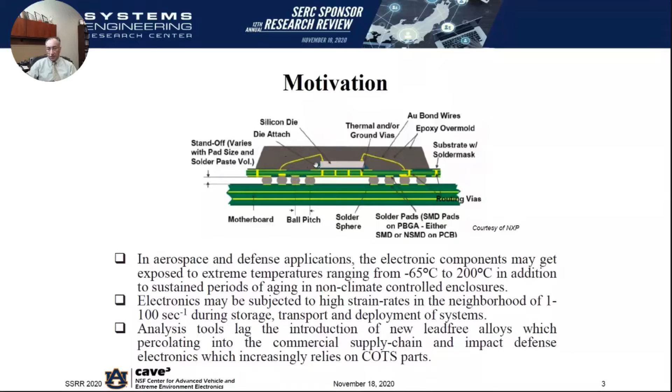So in order to develop tools for mitigation of risk, the first subtask deals with measurement and characterization of the material data and creation of some foundational data sets that would be used to develop reliability prediction models under overlapping stresses of temperature and vibration. So it's a combination of high strain rate and

temperature, and the temperature occurs a couple of different times in this presentation. Firstly, it occurs as a preconditioning method where parts may be stored for a prolonged period of time. A second way that temperature occurs is during operation, which means that the temperature of operation of the part may itself be vastly different. So the way the samples are created, we are creating uniaxial tensile samples.

One is shown right here at the bottom left. And the way we do that is by using glass tubes. So we melt the solder alloy that we are trying to study. Most of these are advanced doped solder alloys. That's what the industry is migrating to for a number of reasons. And these are starting to appear in many of the commercial parts as well. So we have worked with a number of companies to procure these alloys. We melt them in this crucible that has a heating coil around it.

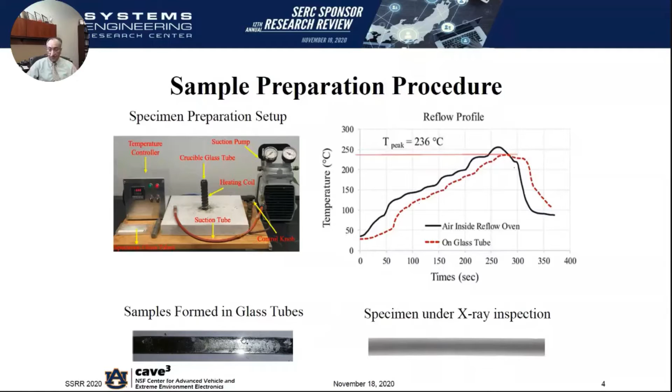And the idea is to create a thickness of the specimen that's about the same order of magnitude or similar in dimension to that of a solder joint, a package level solder joint. Although the width and length are larger, the thickness is very similar to that of an actual joint.

These are some of the test conditions that we are studying. As I mentioned, there are a couple of different temperatures that occur in this test. So the first set of temperatures are operating temperatures. They range from -65 to +200. We are also looking at a second temperature, which is the storage temperature for sustained thermal storage, and that is 100 degrees centigrade. For the most part, we also are taking data on 50 degrees centigrade.

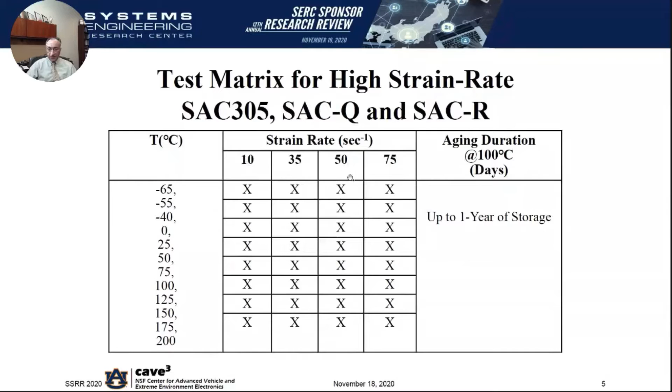A number of different alloys are being studied in this program. So SAC305, SAC-Q, SAC-R, and there are a few others that we won't talk about today. These are further along, and that's what we have more data on. That's what we'll focus our presentation today on as well. Four different discrete strain rates: 10, 35, 50, and 75.

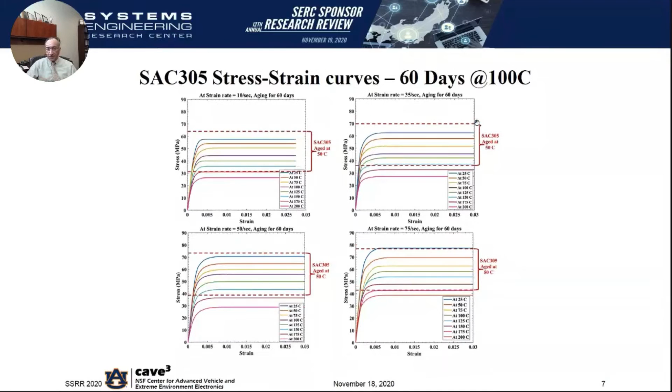And so if I was to go through and flip again, you can see as I go from 30 to 60 to 120, the curves successively migrate downwards, which indicates that the ultimate tensile strength is evolving, the effective modulus is evolving, and the material behavior is continuously changing as well. And the brackets here indicate the effect of the sustained storage temperature. These curves are at 100 degrees centigrade, but if they were at 50, that's where the curves are. And that's data that's been taken earlier on in the study.

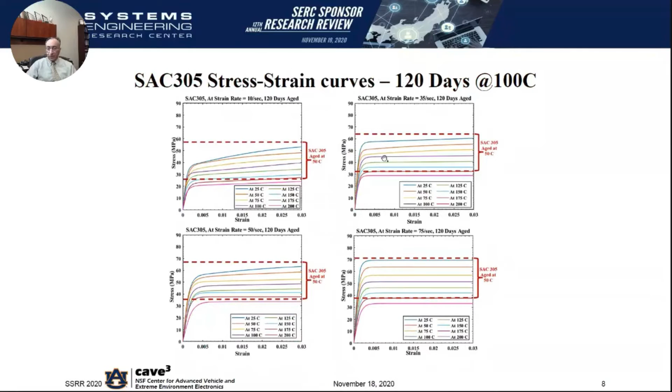So now I'm going to change gears. I'm going to talk about SAC-Q. So these are color-coded. The prior graphs were black in color in the title, and these are red. So that tells you we have shifted alloys.

And here, the data has been taken over the entire temperature range that I talked about at the beginning of the presentation, which is from -65 to +200 degrees centigrade. And so you can actually see a similar effect exists for SAC-Q as well, where as I increase the operating temperature, my ultimate tensile strength is dropping. And as I increase the strain rate, my UTS is increasing, and so is my effective stiffness.

And again, if I go from 60 days to 90 days, I can actually see the curves migrate downwards. And so the similar effect that I pointed out to you in the case of SAC305 also exists in the case of SAC-Q. So one thing that we would recognize is that the material behavior is continuously evolving.

And how does one then capture the entire material behavior in a computational framework that would allow us to simulate the reliability of these packaging architectures under overlapping stresses and be able to predict life and be able to assess risk with the usage of these newer doped alloys in these harsh environments?

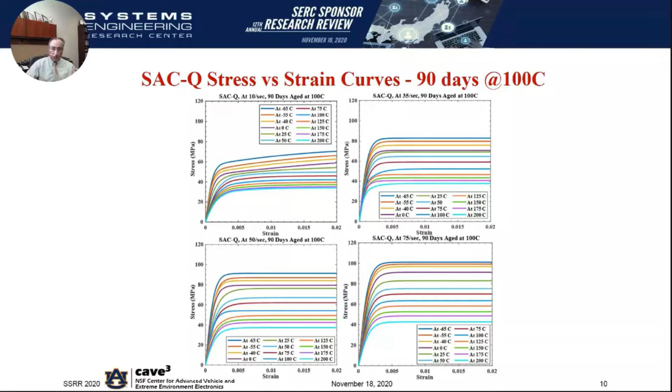So the way we have approached the problem is to use a model called the Anand viscoplasticity model. This is a model that models both the plasticity and the viscous behavior of the material. And the advantage of using the Anand viscoplasticity model is that it's available as a standard offering in a number of commercial codes such as ANSYS.

So if one was able to scale the model to represent the material behavior over the entire range of strain rates tested, over the entire range of operating temperatures, over the entire range of sustained storage temperatures, then perhaps one can actually model these assemblies as well.

So most of us are familiar with Hooke's law. Stress is directly proportional to strain in Hooke's law, and we generally use something called the elastic modulus. But because this is a nonlinear material, we are going to start off with a stress equation that looks like a pseudo Hooke's law, sigma is equal to Cs, where C here, instead of being the elastic modulus, is a parameter that depends on strain rate and temperature. So you can see the form of C here. S, instead of being strain, is an internal variable that represents deformation resistance of the material.

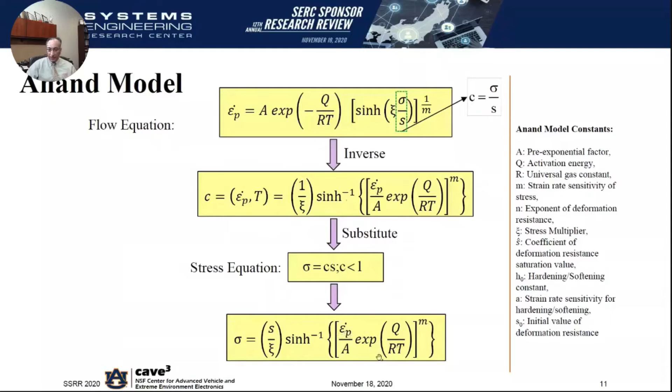And so if one takes the form for C and plugs this into this equation, one can formulate the equation for stress as a function of strain rate, temperature, and the internal deformation resistance. One can then mesh that with the evolution equation. And if one integrates the evolution equation, substitutes the saturation value of the evolution equation, and substitutes the stress equation that one computed earlier, one can formulate a material equation that looks something like this. And this is for the one-dimensional case.

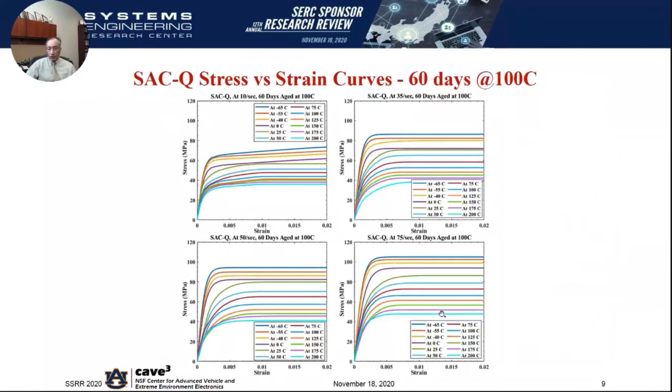The true package deformation behavior is a three-dimensional scenario where the material could be subjected to stresses and strains along all three orthogonal directions. So the way to capture the material behavior in this computational framework is to fit this material law to the entire set of data that I was showing you earlier on. And the way one does that is by fitting the 9 constants that characterize this particular constitutive equation. And that's what we have done as a part of this exercise.

So these are the 9 constants that represent the material behavior. And what we have done is we have fit these constants for each duration of thermal storage. So for 30 days, there's one set of constants, 60, 90, 120 days. So each set of constants represents one duration of thermal storage for the material in its end application.

Now, one thing that's very important to point out is that as an analyst, one is generally used to having one set of material properties. And at the beginning of the analysis, you want to be able to put that into a computer model and say, okay, I want to be able to simulate a phenomenon such as thermal cycling or shock or vibration that the electronic assembly may be subjected to. And those material properties more or less stay constant throughout the simulation. They are the ones that the analyst would put in right at the front end of the analysis when one starts the simulation.

In this case, what we are trying to show is that the material properties actually do evolve as a function of time. And the longer the duration that one's trying to simulate and replicate in a computational virtual platform, the more the material properties are going to be significantly different from those of the pristine material.

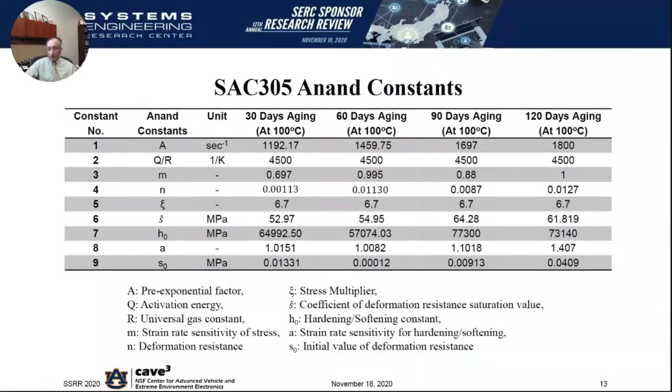And so that's something that one has to be cognizant of, and one can't take the properties as being constant as a function of time through the simulation. So this is for SAC305. The same process has been done for SAC-Q. So we have a set of material constants versus different durations of isothermal storage.

The intent is to actually capture this data for up to 1 year of thermal storage to replicate the risk with using some of these newer doped alloys in the end application. But right now we have about 90 days of data that the samples have been tested for. The remaining samples are in test right now, where they are in thermal chambers for extraction at the end of the 1 year period, and then they'll go into test. So this is an ongoing test, and we are presenting an interim snapshot of our progress.

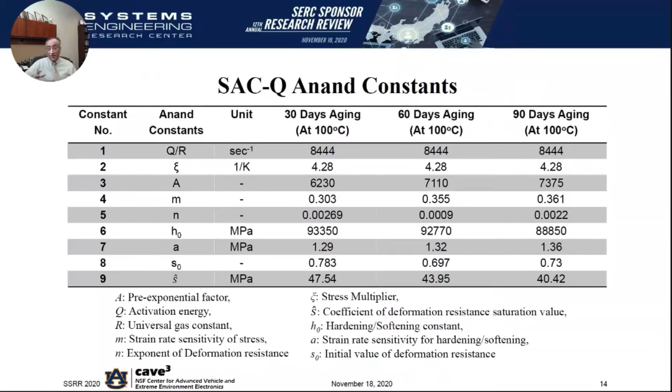So then the next question that one has to assess is, how well does this set of material constants actually represent the original data set that we started off with over a range of aging conditions, over a range of operating conditions, over a range of strain rates. So what we have then done is we have taken these constants that we developed and fit to the material model and said, okay, I'm going to just go ahead and simulate the high strain rate uniaxial tensile test and see how well the material actually replicates the behavior that I started off with.

So what this shows is, James, I'm getting a message saying broadcast has ended. Are we still live? So I'm going to have to go and double check that. I just saw that message too. Give me... You are live. Still live. Perfect. All right. All right. Thank you.

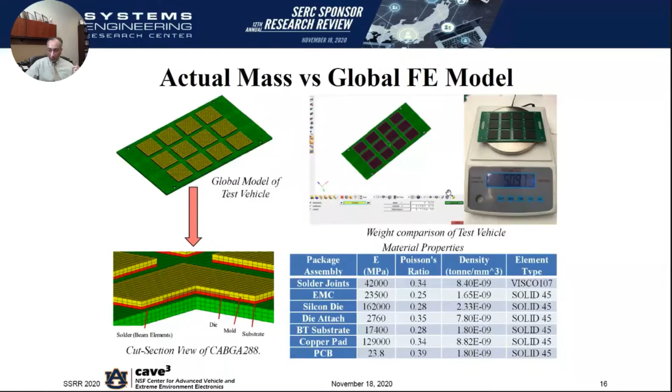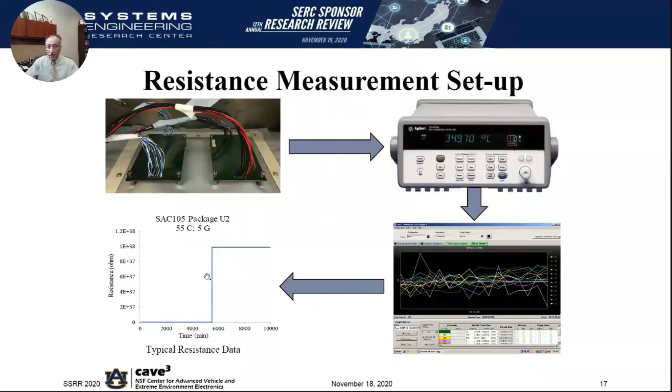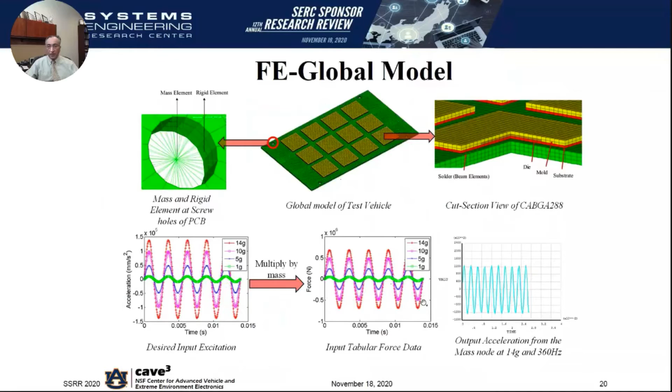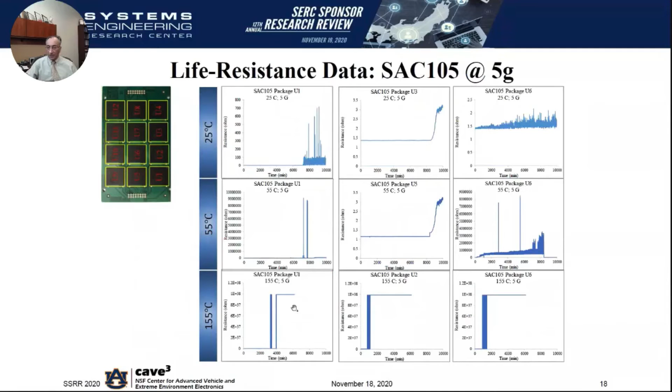So that tells us that the damage is accrued faster in the center locations, which is again what we saw here as well, where the time to failure was lower in the center location compared to the corners. So from that standpoint, the model captures the experimental data extremely well.

So what we hope to be able to do is take these hysteresis loops and mesh them with damage relationships to be able to predict life. That's something that's still work in progress, and that has yet to be done. And once we have that, we'd be able to predict life based on the amount of plastic work accrued per cycle of high temperature vibration.

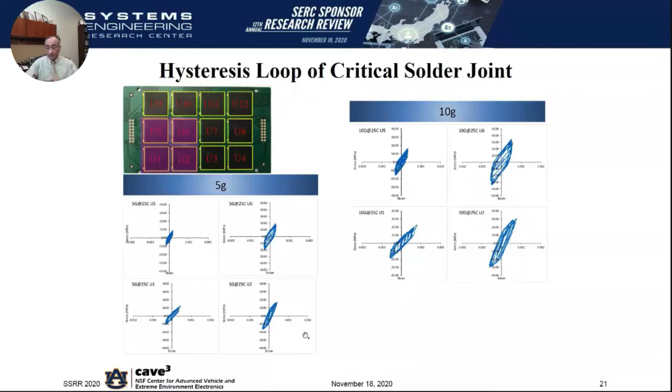So let me shift gears. I'm going to talk about the second subtask. So we'd like to be able to predict life, but we'd also like to be able to mitigate risk using PHM, or prognostic health management. And the idea is to be able to step into the pre-failure space and see if one can identify impending failure. So get an early identification of failure prior to catastrophic failure, so meaningful replacement or repair can take place prior to a catastrophic failure of the system.

And the way we are approaching this is through identification and measurement of leading indicators of impending failure. And these are indicators that we have developed here as a part of this particular program. We'll share with you how well some of these indicators work and which are the ones that we worked on that actually didn't work out so well. And there's some learning in that as well. We'll share with you the effect of the sensitivity of sensor location and the few feature vectors and the embeddings that we have studied.

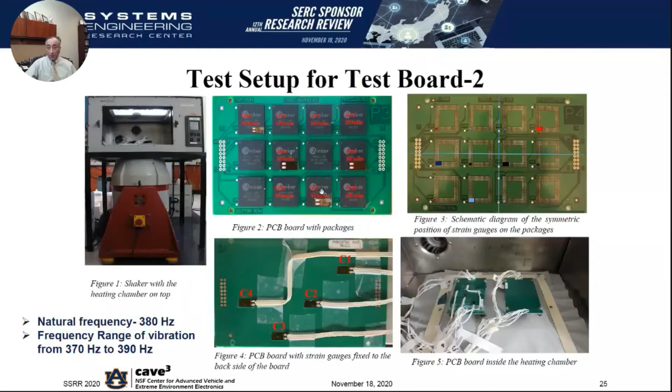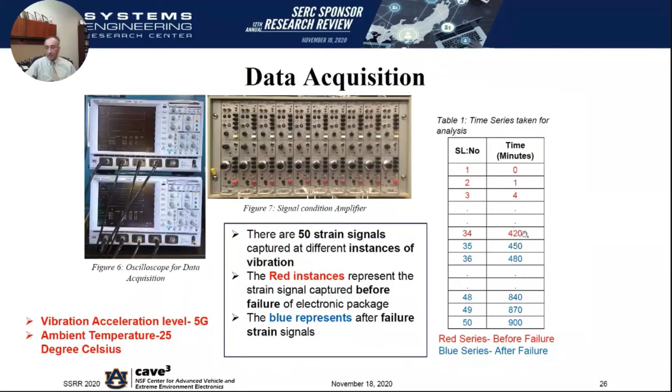So we connect that to a data acquisition system, and we are acquiring strain data and continuity data simultaneously at a very high sampling rate. We test the assembly from the initiation of the test all the way till failure and beyond failure actually as well, because not all the parts in a multi-part board fail at the same time. So we continue to test till everything has failed. So that's the reason why we have these color-coded. Reds are before failure, the blues are after failure.

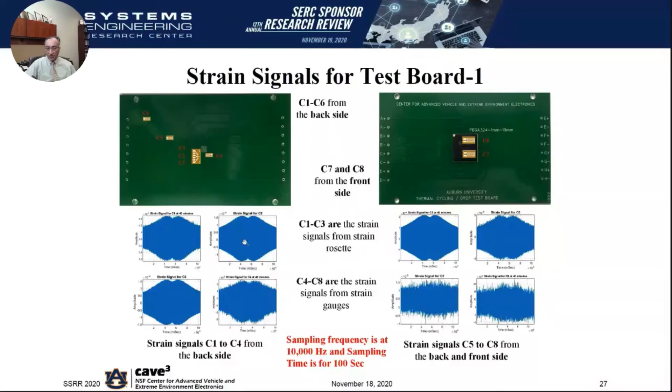So for most part, we have relied on spectral domain analysis. So we take time domain data from the various sensors, and I've already highlighted where the sensor locations are. So that's what the time domain data looks like. So that's for board 1, that's for board 2, time domain data. And you can actually see what the time domain amplitude looks like. There we have a peak closer to the natural frequency as the frequency sweep is going on in that narrow window. We take that information into frequency domain, and the tool that we have used is the discrete Fourier transform.

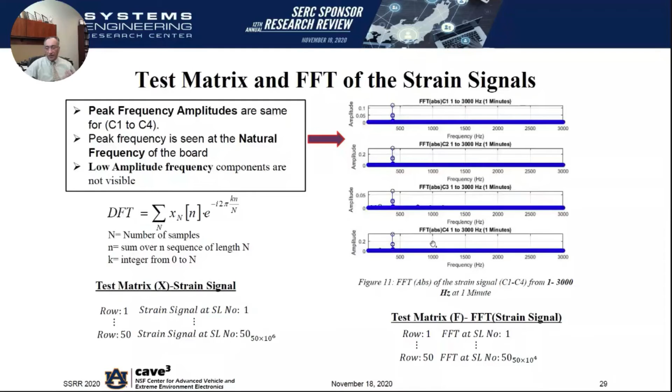And so there are 50 data sets throughout the lifetime of the board assembly that we just progress through failure till after failure. And so these are the various sensor locations. So if I was to compare different sensor locations, first thing I see is if I were to just take an FFT, I actually don't see very much difference visually. So what we have done is we have tried to segment the data into a narrower band, looking at a band of 500 to 3000 hertz.

And if I step forward in time, so this is 1 minute data. If I step forward in time to 40 minutes, now I can actually start to see features. And there's a variance between the different sensors. There's also changes between before failure and close to failure. Failure happens close to 450 minutes for this particular board assembly, as I will show you in a few moments. So you can actually see that the feature vector actually changes before and close to failure. Similar changes, C5 through C8.

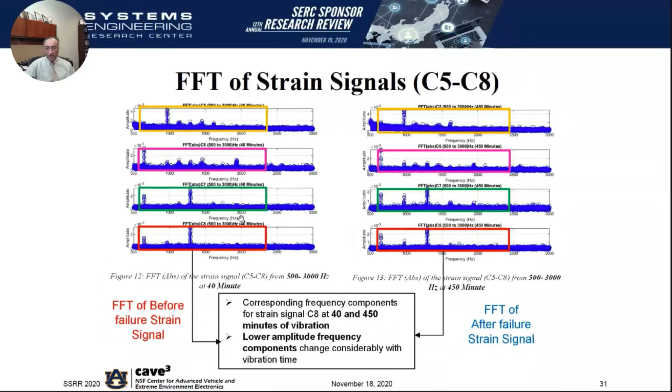You can also see the variance between the different sensor locations as well. So then we have formulated two different feature vectors. The first one is based on principal component analysis of the FFT of the strain signal. The second is based on the PCA analysis of the instantaneous frequency.

So we basically take the time domain signal, take it into frequency domain, compute the instantaneous phase, compute the instantaneous frequency, use the instantaneous frequency PCA analysis to be able to create the feature vector embedding. So that's basically what we are doing.

So now if I plot the feature vector in the feature space, so that's my principal component space. Ideally, I want assemblies with different amounts of accrued damage in different parts of the feature space. So the reds are in different locations than blues. Reds are before failure, blues are after failure. So you can pretty clearly see that one can put the parts with different amounts of accrued damage in different parts of the feature space.

Second thing one can see is that if one looks at the variance of the PCA components, the variance increases tremendously prior to failure. So the dashed line is prior to failure, and the variance increases tremendously prior to failure. So that's extremely helpful. So the variance is a good indication of impending failure.

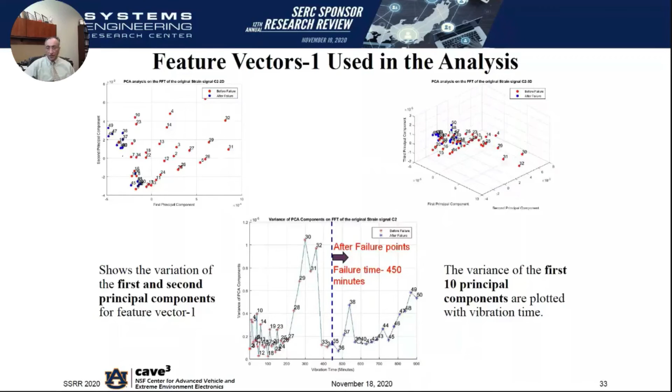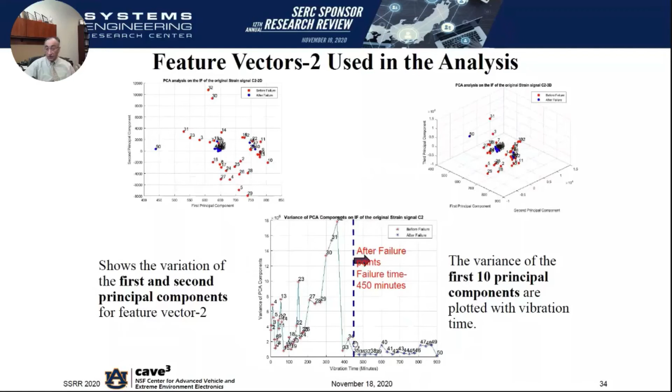So similar trends in feature vector 2, occupy different parts of the feature space, similar increase in the variance prior to failure. So feature vector 1 and 2 work extremely well in this particular case. So I can see them side by side. I can look at the increase in variance prior to failure. So the left one's based on FFT PCA, the right one's based on PCA of the IF.

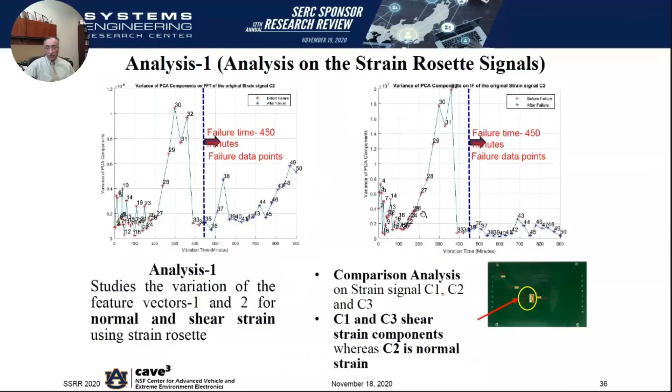So then what we did was we wanted to look at, well, what about the shear components? Do shear components provide us additional insight beyond the initial insight that we developed using the normal components of strain? So these are the normal component variances. So they still look great from the strain rosette, but the shear components actually don't. So our variance actually increases after the failure time.

So shear components actually are not very valuable from our standpoint. Either they increase after failure or they increase much before failure and still spike after failure. So they are not good candidates for feature vectors. So in the spirit of full disclosure, we are sharing with you what worked, but also what didn't work.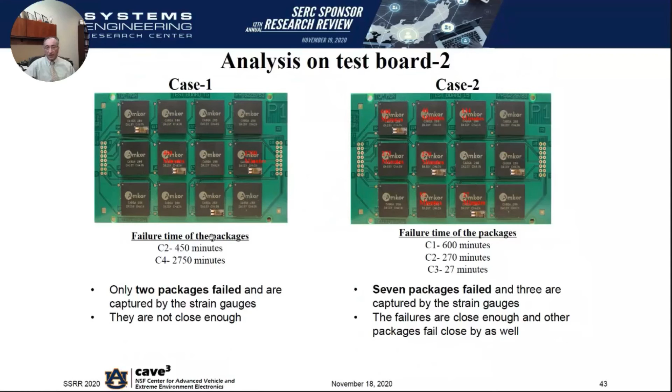Similar thing on C8, a lot of noise here in the IF based feature vector, and the FFT based feature vector on top of the package does not work either. So then we started to look at how does the board assembly fare if we had multiple failures occur? Does our fidelity go down if multiple failures are accrued on other parts, but not the part of interest? So that's what we are showing here, where 2 parts have failed in case 1, 7 parts have failed in case 2 out of the 12.

So Pradeep, I'm just interjecting to give you a 5-minute warning. Yeah, I'm on my second to last slide. But thanks for the heads up.

So one can actually see the variance increase just prior to failure for the IF-based feature vector, and I can see both C2 and C4 exhibit that behavior and the ability to identify impending failure.

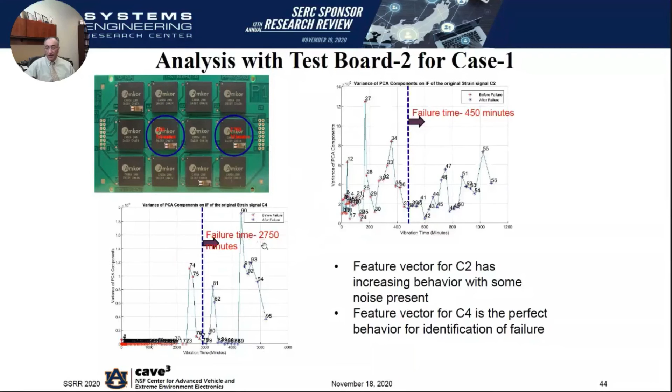So with that, I'd like to summarize. So what we have done is we have shared with you data on 2 subtasks. The first one being high strain rate properties after prolonged storage, where we shared with you data on a number of different advanced lead-free alloys at high strain rates in the range of temperatures of -65 to +200 degrees centigrade, and we shared with you a method to actually model the constitutive behavior using Anand viscoplasticity.

We also shared with you how the model would be implemented for assessment of the transient dynamic behavior of board assemblies in harsh environments under overlapping stresses of temperature and vibration, and we showed how to create the hysteresis loops.

In a second subtask, we shared with you the development of feature vectors. We shared with you two feature vectors, one based on PCA of FFT, the second based on PCA of IF. We shared with you how well these feature vectors work, in what cases they do work, what cases they don't, and which of the two is more robust for exposure of board assemblies and identification of early impending failure under overlapping temperature and vibration. So with that, I'll stop.